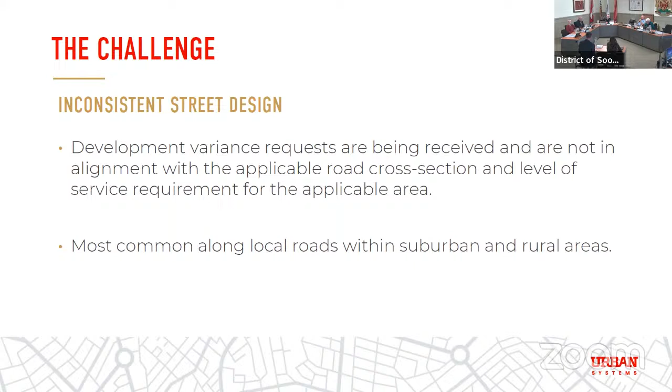As far as what we understand the challenge to be, variance requests have been received more so over the last 6-12 months, and they're not necessarily in alignment with the applicable road cross-section or level of service for the applicable area. Those are the cross sections living within the current bylaw 404. We understand that most of those variances are occurring around local streets, whether suburban or rural areas.

As far as the ideal outcome, we would love to have input here that would inform any changes to the bylaw 404 update, which is currently underway. When we say what and where, the what is what the cross sections need to include, and the where is where they should be applied. Those are the two big questions here, and within both there are many variables. But those are the details we're looking to discuss and get input on from yourselves today.

The Transportation Master Plan is a document that articulates the community's vision, and typically these are supporting an OCP. They direct decision-making and implementation, but they're not regulatory in nature. Typically they are inspiring for the regulation, in this case bylaw 404, where we can find the cross sections that pertain to this conversation today.

Now, as you can see here, bylaw 404 is a requirement of subdivision or building permit. It establishes standards for all works and services on or immediately adjacent to a development site. That is the regulatory piece of the discussion today.

For the development of the TMP, there are about 3 main phases of engagement: open house and community workshops. Much of this engagement occurred concurrently with the Parks and Trails Master Plan at the time—so open houses, a larger community survey, stakeholder workshops and interviews, and finally, shown there in a different color, a virtual open house.

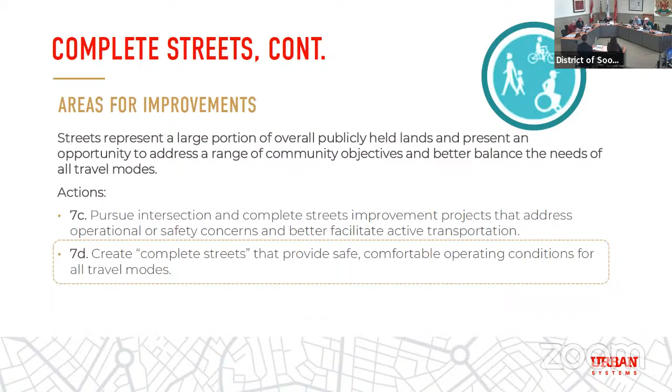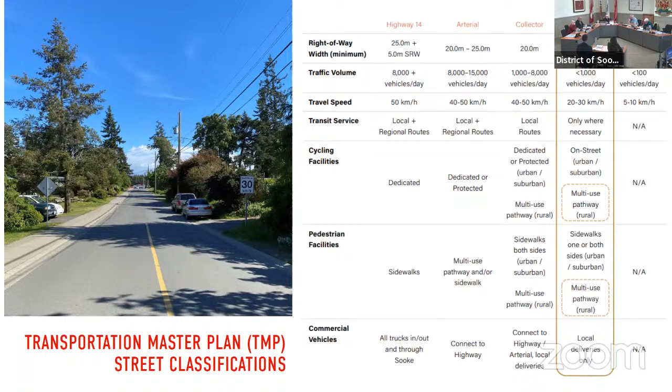We'll get into what this means in the bylaw 404 portion of the presentation. Here, just generally showing the road classifications to build on the context of the previous slide and the cross-section characteristics typical for those. Much of these are now included in subdivision bylaw 404.

Oops, sorry, I'm excited there. Oh, where am I going? Did I go the wrong way?

Okay, sorry about that. I think it skipped ahead a dozen.

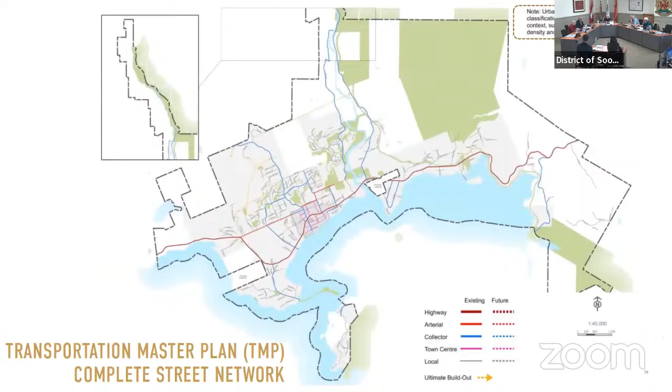In summary, the Transportation Master Plan was inspired by the original Transportation Master Plan, updated to reflect better modern best practices, with much input from the community reflected in the new updated 2020 Transportation Master Plan.

It does include a long-term vision for the multimodal transportation network. The goals and priorities support multimodal infrastructure and highlight the importance of better balancing the needs of all road users. The cross sections identified within the TMP provide space for people walking, cycling, taking transit, and driving, therefore helping realize the long-term vision of the TMP.

So with that, this will be our first opportunity for some questions or discussion around the Transportation Master Plan directions held within it. I've got a few prompting questions here that I will read out, but certainly open to larger discussion. We would love to understand what common challenges you encounter related to realizing the directions set forth in the TMP.

What are the common concerns to the existing cross sections, those that are within the TMP and therefore now living in bylaw 404, and any other items related to concerns or clarification from the Transportation Master Plan? That's portion 1 of 3, opening the table for discussion. Thank you.

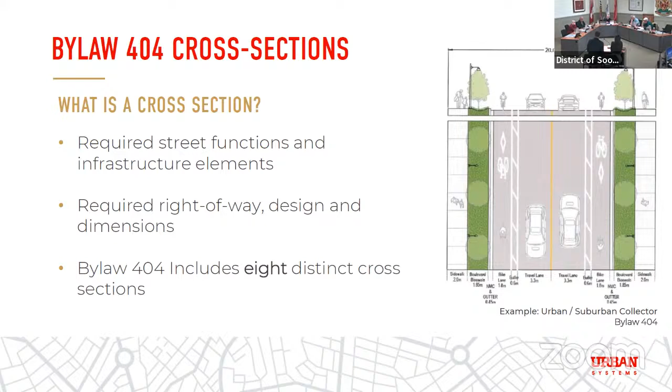Cross sections also dictate the types of facilities we want to see within the street, and that varies based on area or context, as well as street type or classification. It lays out the functional layout and required dimensions - how wide must a travel lane be, or a sidewalk, or a boulevard. It just looks like a visual on the screen, but there's a lot behind that in terms of what is being set out as an actual requirement through the cross section.

One of the things inherent in this exercise of envisioning required cross sections is striking a balance between how much width or right-of-way you can ask for, and the functions we're trying to achieve within those rights of way. The graphic on the screen is helping to highlight the problem - there's a lot of requirements on space, and with that, costs to build these facilities within the limited rights of way that we have.

So what we're trying to strike the balance of in the cross sections presented in the TMP and now in the 404 bylaw is identifying those facilities that are most needed based on the intended function of that street - whether it's a major or minor street - and which area of the community it's found in: town center, urban, or rural area. That's really the intent behind how these cross sections have been developed, to balance the need for these facilities with the space realistically available within those rights of way.

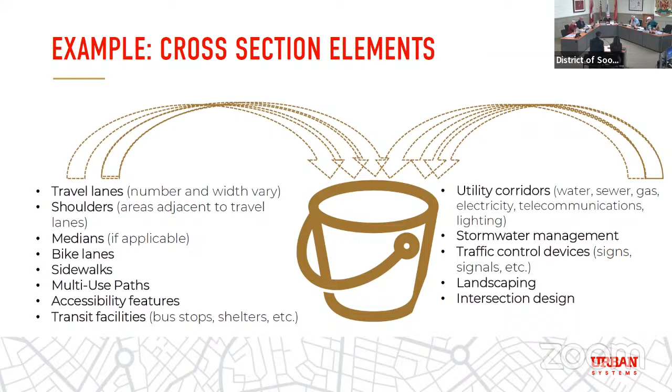This slide might be redundant now, but what we're understanding from the group is that the challenge is you're building out your town center streets, and you've made a lot of progress on your arterials and collectors. But where the friction comes in is what's happening on these local roads, and the difference in context between what might be applicable on an urban or town center local road versus what logically belongs on a rural local road. That's really what we came here to understand, and that's the crux of the discussion - these local roads and their context.

We wanted to highlight first the local road cross sections that were in the TMP and are the basis for the most recent version of the SDS bylaw. Importantly, what's shown in the cross section for urban/suburban is travel lanes, where vehicles would travel, and the potential for on-street parking in certain situations. There's also boulevard or stormwater management opportunities at the roadside, and sidewalks on one or, in certain cases, both sides. That's generally what's in the local urban cross section.

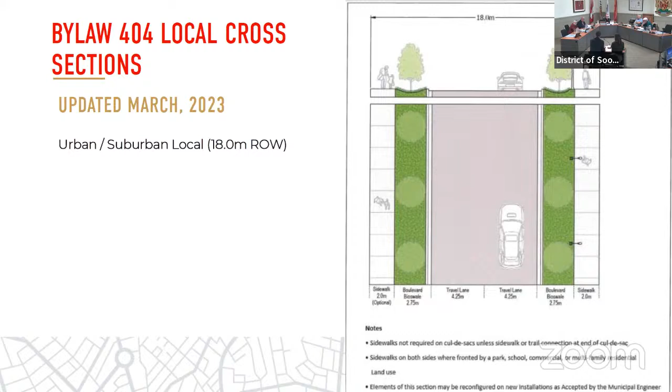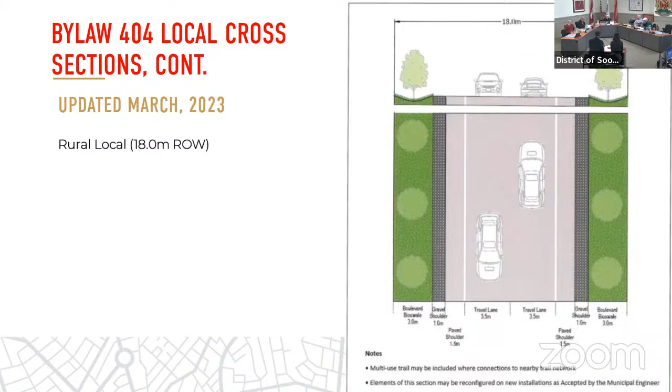I think if we go rural local, obviously these are meant to be applied in more rural, less dense contexts, areas where a more limited amount of development is occurring. Rather than some of the more urban features with curb and gutter and on-street parking, we're looking at travel lanes with paved shoulders and gravel shoulders, and then drainage features at the edge as well. So these are what were in the TMP and what's been brought forward for the more recent SDS bylaw.

So what we wanted to do, we came here understanding that there was concern over either the level of service, the extent, and maybe the cost of the facilities being required through these local road cross sections as part of the challenge here.

So we did a cross comparison to some other peer or comparable communities. We skipped over the Saanichs and City of Victoria and focused on communities that might be a little more representative, and which have been updated in the last 5 years, so more recently. We don't want to model ourselves off communities that might have a 20-year-old bylaw, so we wanted to look forward a little bit in that sense.

So here's a list of the communities we cross compared. What we wanted to do was compare urban local requirements in Sooke to urban local requirements in these other communities, and rural local requirements in Sooke to rural local in other communities as best we could. We grabbed them all, made a spreadsheet, and cross compared quite literally the facilities and the dimensions for those facilities required across the other communities.

Generally what we found was that a requirement for 18 meters for a local road is quite common. We do see as limited as 15, or maybe even lower in certain communities in constrained locations. We do see as high as 20 typically for locals, but 18 is quite common. So we're kind of, we'll say, on the mark from that respect.

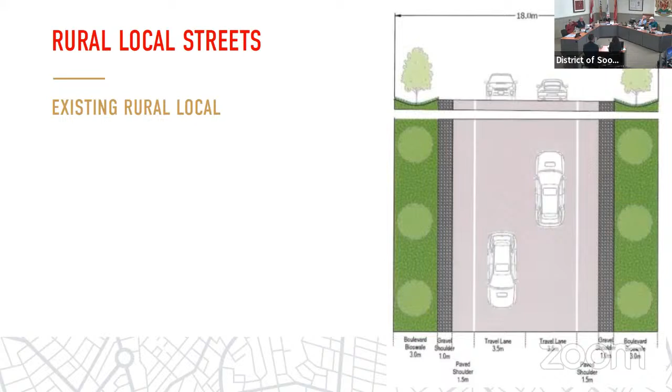Now, as far as a potential alternative rural local, we're calling it—this has been identified based on the variances that have been received recently in council, and would include a multi-use pathway or multi-use trail to accommodate active transportation. In this conceptual cross section you see in front of you, this is currently like a hard-packed pathway, and it could apply to the Gatewood residential area or the Silver Spray comprehensive development area. Those have been identified again because of the recent variances that have been approved.

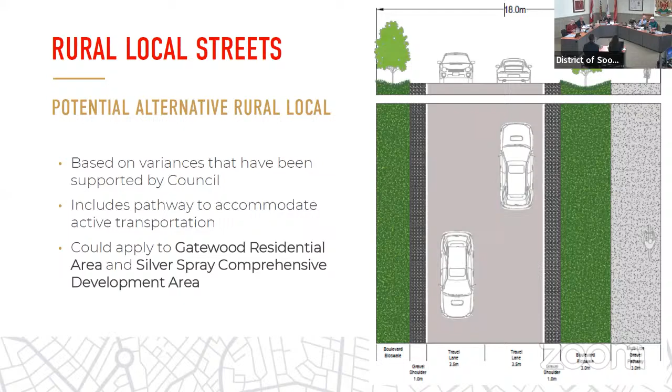Where a cross section such as this is applied is certainly up for some discussion and exploration. So just to compare to the current existing rural road, you'd basically be taking the 1.5 meter shoulders and allocating that space as a 3 meter multi-use trail on one side of the road, as you can see highlighted here. So just for simplicity and consistency going forward, we'll call that the secondary alternative to a rural cross section.

Where this would be applied, we're moving towards the where now. Here is the current level of service roads on the map, which really we've got town center, suburban, and rural, huge swaths of areas. And we've heard many times there's a lot of nuance within the district as a whole. So moving forward, my red mark boundaries on this are to better align with the land use boundaries included on the map here. But for visuals, it could apply to the Gatewood residential area and Silver Spray comprehensive development area as potential service areas for the secondary cross section we've put forward.

Now, we've already talked about the land use designations on the map in front of you. Here is the draft OCP. We also have the current OCP land use as well. Now, best practice for determining urban, suburban, rural is tied to land use. So something to keep in mind when selecting boundaries: the strong preference, and best practice, would be to stick within distinct boundaries to define those service areas that would be receiving the cross sections we'd be putting forward. So those would be the suburban urban locals, a rural local, and then the secondary alternative at this point.

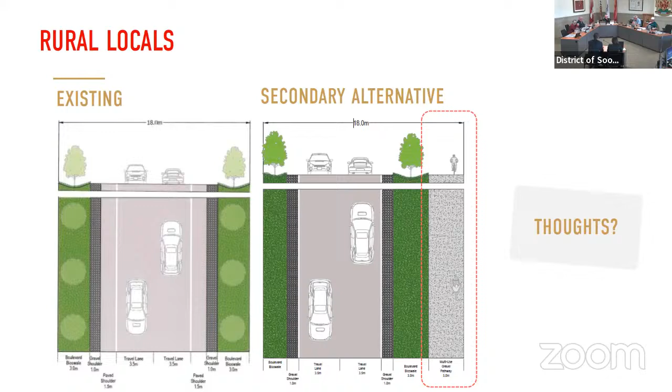I'm going to open up then to members of the public for questions and comments. Would you guys like to grab a chair and a mic over here? You might need to answer questions.

As far as, sorry, state your name and your municipality. I'm doing a development on Penang Road.

I think it's the only gravel road in Sooke. It has no water, it's at the end of Ella Road. It is totally rural, there's like 6 people on the road that live there. So I would like to see that categorized as well.

We've been told that we have to do streetlights and sidewalks, which is urban collector standards on a rural road. The way we used to always do it is we'd look up the road category, or we'd phone and ask what the category of the road is, and that told us what to tell our clients. We can't do that anymore because it doesn't matter where it's going, it comes back as urban collector standards.

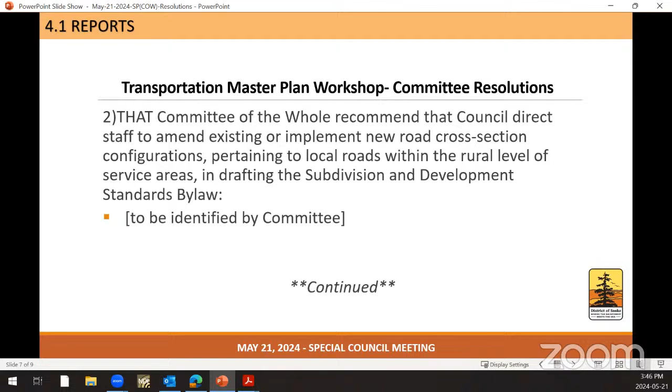Or, just a point of order - what's missing here? For me, it has a colon subdivision. We're directing - oh, I see. And then it says to be identified by committee. So what have we identified? I don't know if something was said and there wasn't a microphone on it. I don't actually know what's missing here. Or sorry, what is missing? Something's missing. Nothing is identified.

We have a solution that we presented, a solution for council's consideration that could be one of many. So it's a matter of if council would like to make a recommendation with regards to the rural and suburban boundary. Right now, in the report, it suggests considering rural instead of suburban for the Gatewood residential area as well as the Silver Spray area.

And it's asking - it's suggesting incorporating a new rural local cross section as well. Okay, so for the benefit of those viewing online, can that be put on the screen, where that bullet is? Or can it just be read out, so the closed captioning will pick it up?

Staff are discussing it. Councillor St-Pierre has a question.

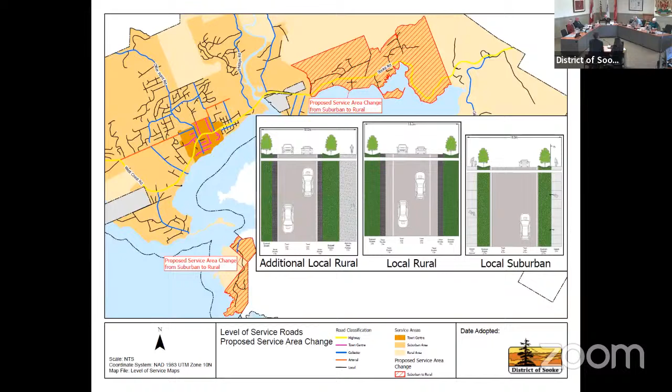Okay, Mayor Tait. Thank you, Chair. Is there an actual motion on the floor? Is this a live motion that we're debating now? No.

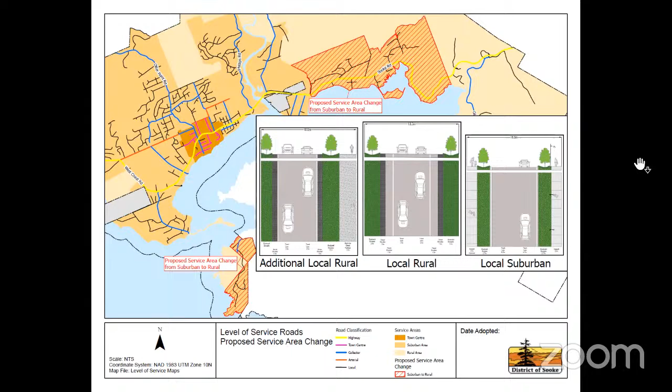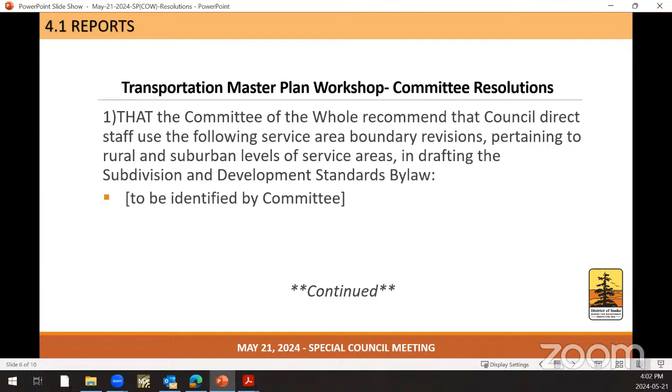Okay, I was going to propose a resolution here because it seems that what council is asking for isn't necessarily being understood clearly, and perhaps there's back and forth. It would just be that the committee of the whole recommend council direct staff to report back on the outcomes, what was heard, or next steps following today's workshop, May 21st. So from today, and I guess I can move that.

So I'll speak to it and you can throw it out if you like. It's just, what did council bring forward, either through the written submission before or through conversation today? What has staff heard and what are the next steps? Because it just seems that there's something missing to me. What is the policy piece that's missing that council should consider?

I feel we drift into very technical pieces that creates a reaction by staff and the consultants. I understand why you do this work every day, so it may not be obvious to a lay person who is an elected official. So the impact is unknown or not fully realized.

So that's where it's like, okay, we've had this workshop today. What did we learn? Here's what the next pieces are. And this is what we recommend changing, leaving the same, or not.

The road atlas seems really informative. Then there's sort of pushback to that. I don't understand why. So I don't want to abandon it because I don't understand it. Is it funding? Is it what?

I just thought it would be an appendix to the master plan and not a redo or a rewrite, but staff feel different. And again, I'm taking a layperson's perspective and trying to figure out what the overarching policy is and what are we trying to solve here. And that's not clear to me.